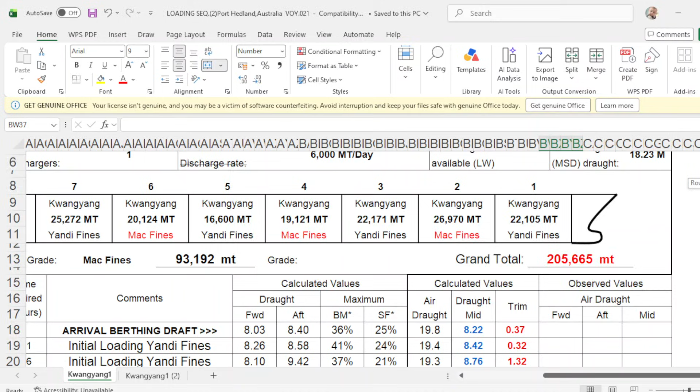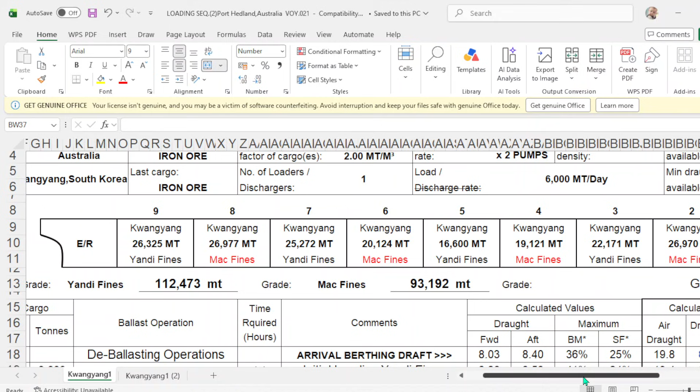If you remember last time, the cargo to load was 205,665 metric tons, and the trimming hold is 8 and 2. Okay, this is the Capesize vessel MV Cape Odyssey, loading in Port Hedland, Australia, and discharging in South Korea. The cargo is iron ore, and the water density at berth is 1.025. The cargo is Yandi Fines, and the vessel is to load from hold number 1 to hold number 9.

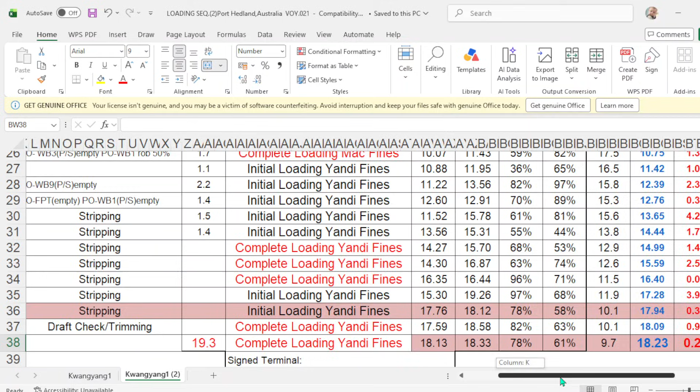This was our previous video about trimming hold of 2 and 8. Now, during that time when I was chief officer, the captain told me to make a loading plan or loading sequence for trimming cargo holds 2 and 8 and 1 and 9 with the same departure draft of 18.23 meters mid. The same draft forward 18.13 and aft 18.33, which is trimming hold of 2 and 8, and the mid draft is 18.23 and trim is 0.20. That is for trimming hold 2 and 8.

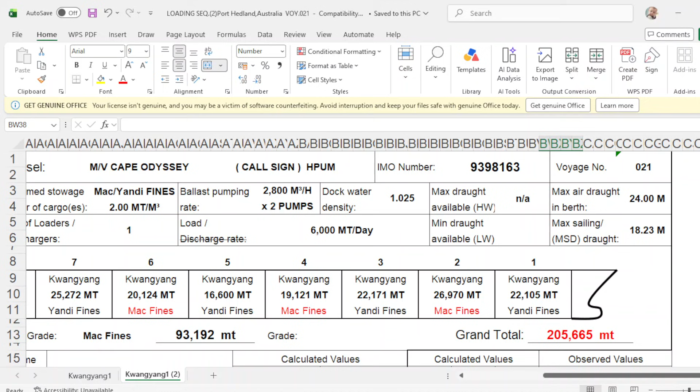Now the captain asked me to make another loading sequence, and the trimming hold would be 1 and 9, with the same draft forward of 18.13, aft 18.33, mid 18.23, and trim 0.20, with the same amount of cargo of 205,665 metric tons. So we'll just concentrate on this second loading sequence with the trimming hold of 1 and 9. Okay, so let's start, guys.

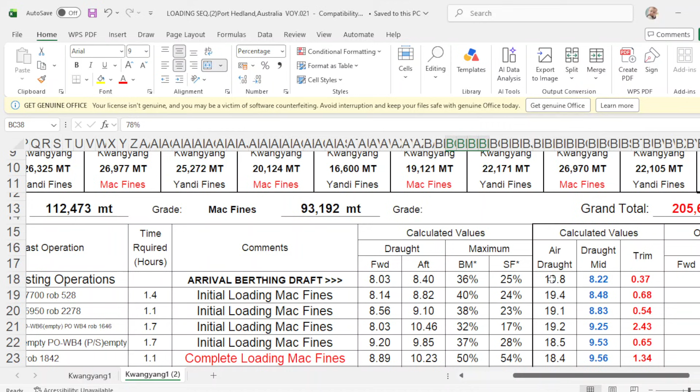Assuming that we have completed the draft reading and we both agreed that the forward draft is 17.76 meters, aft draft is 18.12 meters, the mid draft is 17.94, and the trim is 0.36. Usually the draft surveyor has his own program, and I myself have my own program. So let's begin, guys, and apply this draft to our program.

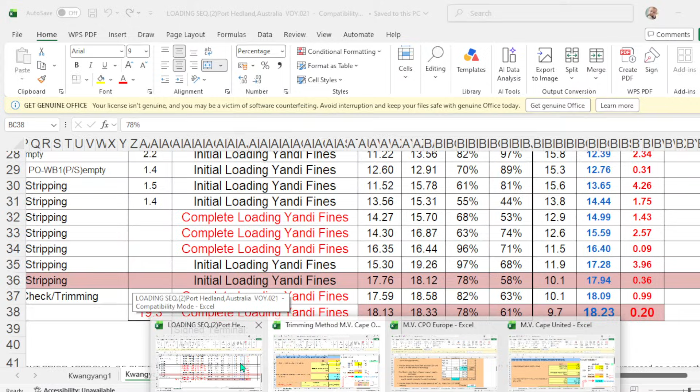So I will go to the vessel, which is MV Cape Odyssey. I'll start with form number 6, which is how to find trim when handling several moderate weights. So how much was the draft forward? Draft forward is 17.76, and draft aft is 18.12. Okay, so put there 18.12.

Take note that the mean draft is 17.94 and the trim is 0.36, LCF, MTC, and the TPC. Just take note of the TPC 138.70. Take note that at the start of loading the density is 1.025, and upon completion the density is 1.025. Then the surveyor and myself, or the chief officer, agreed that the actual mid port is 17.94, the same as your mean draft, and actual mid starboard is the same, 17.94.

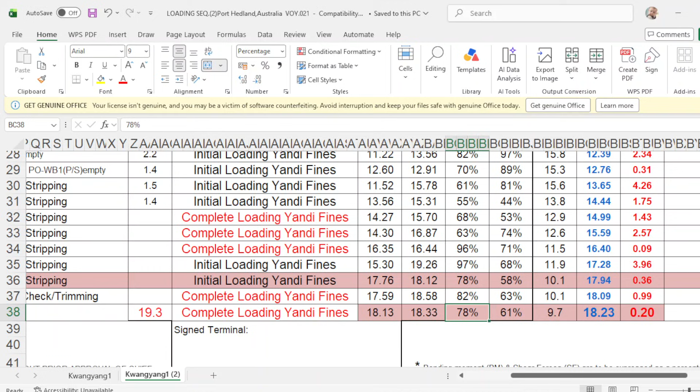And your final mid departure draft is 18.23, and this is your trim of 0.20. So your departure draft is 18.23, so put here 18.23. Then the recommended cargo to load for trimming is 4,022.6, while the sequence recommendation is only 4,000. So we are 22.6 tons more than the loading sequence, from the plan.

Okay, that's 138.71 times 100. So I will repeat: sinkage times TPC times 100 is 4,022.6. Okay. Then you scroll down, follow this arrow, then put this figure here. That will be 4,023. If you round it up, that will be 4,023.

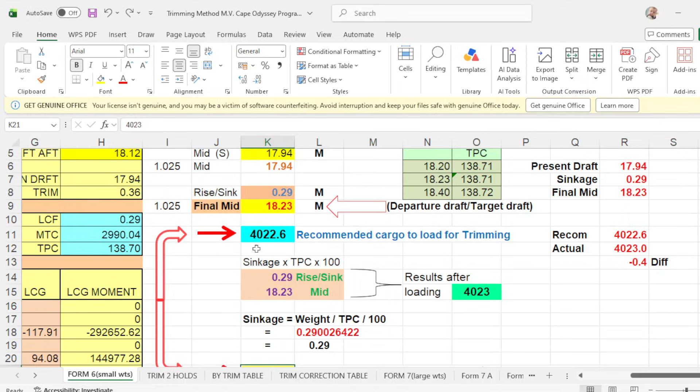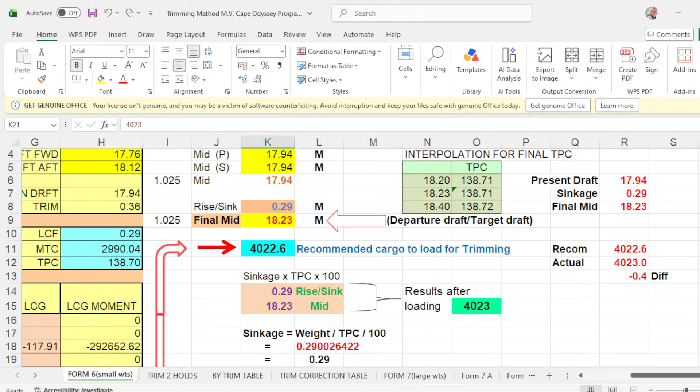So, your weight is 4,023 divided by your TPC of 138.71, divided by 100, then you will have 0.29, exactly the same as your sinkage here. Anyway, this formula here is the same as this one. I am just showing you how it is being done here. Okay, so let's go down.

Once you get your actual cargo to load for trimming, then you go to trim 2 holds. So you go to trim holds 2, click this one. Then trimming with 2 holds. Take note the remaining cargo for trimming is 4,023. Your initial draft, mid draft, trim, your MTC, LCF, and TPC. Then the trimming holds now are 1 and 9, right? Put 1 and 9.

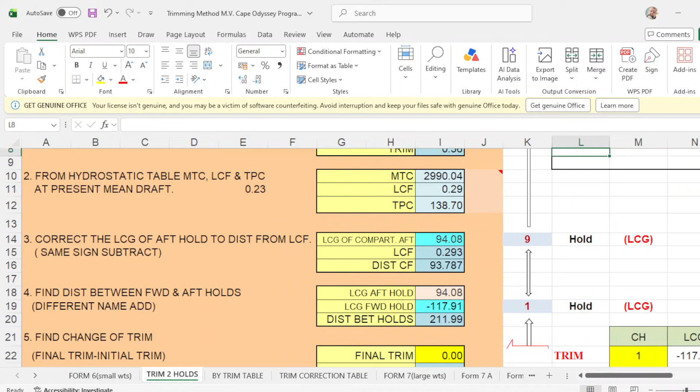Okay, take note that 1 and 9 are registered here and here. But if, for example, the trimming holds are 2 and 8, take note of the changes. 2, enter, 8. The figure here will also change. There's now 2 and 8. But our trimming holds are 1 and 9. So let's put it to 1 and 9.

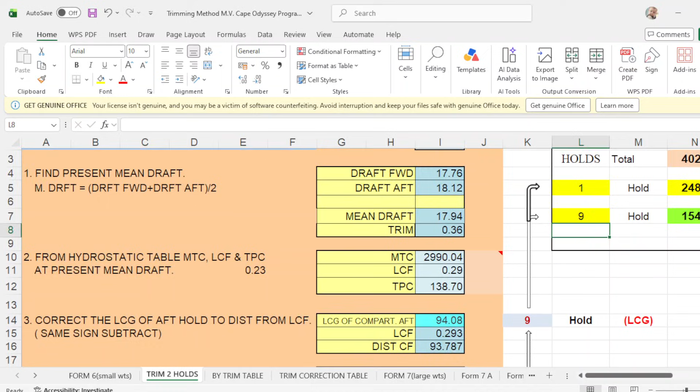Again, scroll down. What will be our final trim? According to our sequence, the final trim is 0.20. This is the mean draft and the trim of 0.20 or 20 centimeters. So we put here 20 centimeters or 0.2. Enter. And it will tell you what to load in hold number 1 and hold number 9.

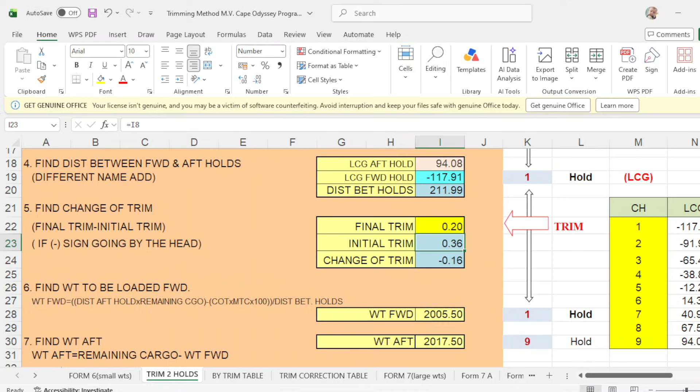So number 1, we have to load 2,005. Put here 2,005. Enter. And number 9 will be 2,018. If you round it up, your departure draft would be forward 18.13 and aft 18.33. Your trim is 20 centimeters, your mean is 18.23. Okay?

If departure draft is 18.23 and your trim is 0.20, then your deflection is 0. How I get this deflection is mid draft minus your mean. So where is your mid draft? Go to form number 6. Take note after loading 4,023, the result will be your mid draft of 18.23. You click this one, press enter, there you go. And your mean draft, press equals, and this is your mean draft. Press enter, and your deflection is 0.

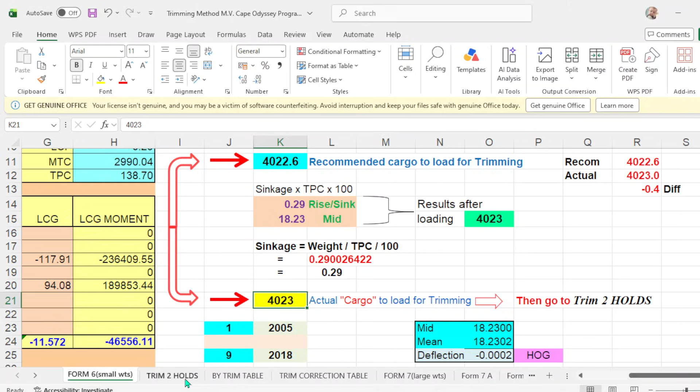Okay? So after completion of this program of 2 holds, you go back to form number 6. You scroll down. Take note that number 1 and 9 are registered here, and the cargo for number 1 is 2,005, and number 9 is 2,018, which is exactly the same here. Go back to form number 6. Then put holds 1 and 9 here. Put the cargoes corresponding to the cargo hold, and let's check the LCG of number 1. Scroll down.

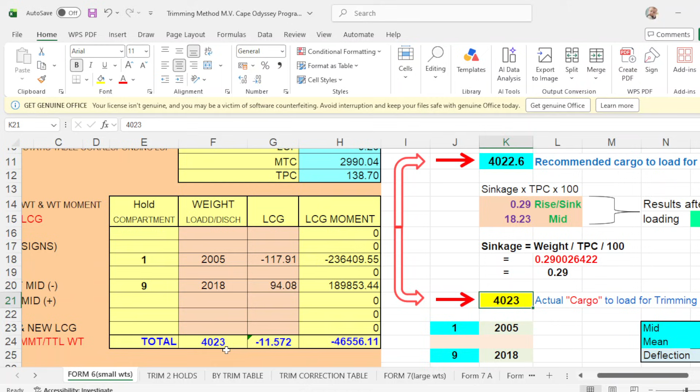LCG of number 1 is negative 117.91, and number 9 is 94.08. Okay? Then you scroll down. Your departure draft would be forward 18.13, aft 18.33, which is the same with your trim 2 holds. Okay? Forward is 18.13, aft is 18.33, which is the same here.

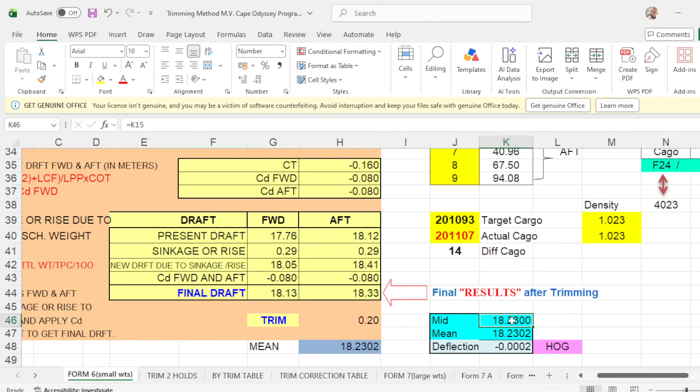Your trim is 0.20, and your mean is 18.23. Your mean is 18.23, and your deflection is 0. Again, where did I get this mid draft? Put equals, and your mid draft is this one. If you remember, press enter. And your mean draft, put equals there, and this is your mean draft. Take note that your deflection is 0. So mid draft minus mean draft is 0.

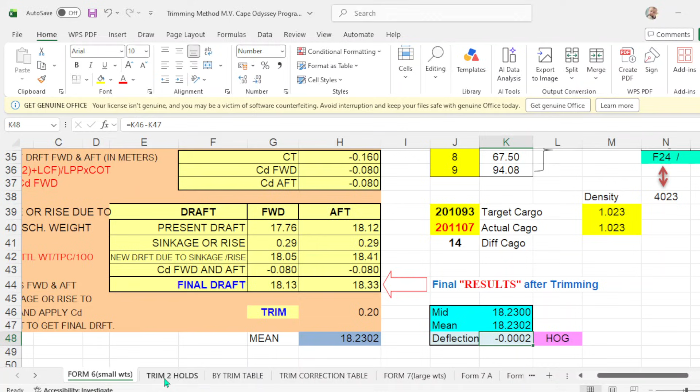So we have 2 programs form number 6 and trim 2 holds. Then we go by trim table. This will be program number 3. Take note of the trimming amount of 4023, trimming hold, and the amount of cargo in each hold to trim. Then we will apply the forward correction of hold number 1 and number 9. So we go back here to the trim correction table. That will be 1 and 9. Our departure draft is 18.23, so you select 18 because it's the nearest.

So hold number 1. Highlight this one, make it red and bold. And this one, put it back to normal, take out the bold. Then we go to hold number 9. That is L. Go to number 9. This is hold number 9. Make it red and bold. And this number 8, put it back to normal, to black and unbold. So this is now your 9 and this is your 1.

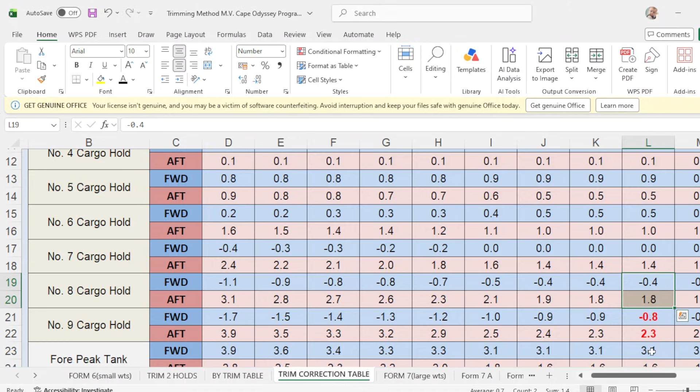So hold number 1, the forward correction is 2.7. So put here 2.7, and aft correction is how much? Negative 1.3. Put here negative 1.3. Then the forward correction in hold number 9. Go back here, hold number 9, scroll down. Number 9 forward is negative 0.8. Put here negative 0.8. And aft correction in hold number 9 is how much? 2.3. So put here 2.3. Then what will be your departure draft?

Your forward here should be 18.13 and aft should be 18.33. So first adjust this one. Your trim is short of 2 centimeters. So adjust this, make this 18.13. Go up a little bit. Then adjust the forward correction. This is your forward correction. This is your aft correction. Then you adjust the forward, make it 18.13. Let's say make it 2.6.

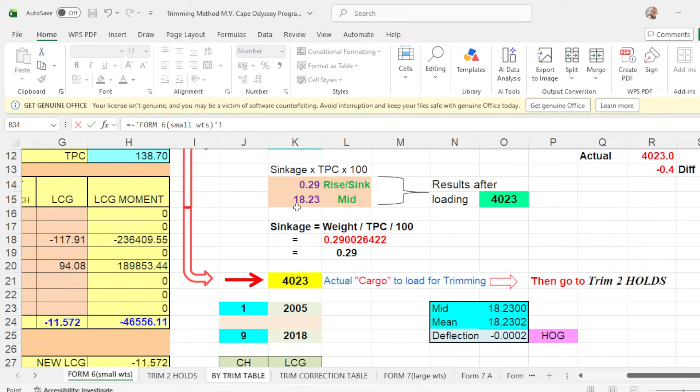Forward is 18.13, aft is 18.33, mean is 18.23, mid is 18.23, trim is 20, and it's now okay. The same with your draft here: forward 18.13, 18.33, 18.23, and 23, which is the same here. Now take note, your deflection is 0. You have to know where I get the mid. Put equals here, go to form 6, and this will be your mid. After loading this cargo of 4023, this should be your departure mid. And your mean draft is equals, and this should be your mean draft.

Okay. I'm sorry. Equals, this one, and click this one. And your mean equals, then click this, your mean, then your deflection is 0.

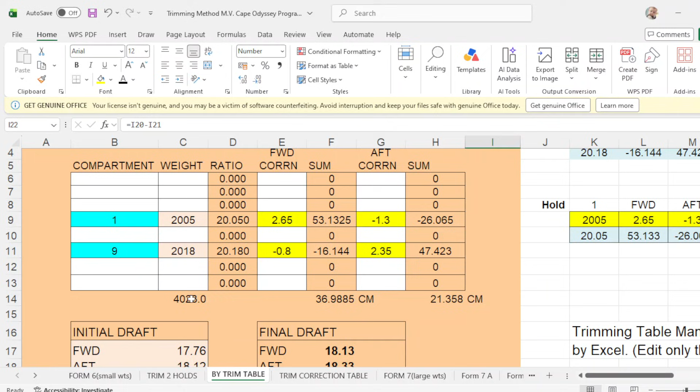Now take note, guys. You don't know which cargo hold to load first. It's either 1 or 9. If you load number 1, you will trim by the head, and if you load number 9, you will trim by the stern. So I would prefer you load number 9 so that you will have a good trim by the stern before you load number 1. So here I made a program where we load first in hold number 9. Take note of hold number 9.

The cargo is 2018, which is the same here. Correction is negative 0.8, same here, and 2.35 here. And number 1, the amount of cargo is 2005, the same here. Correction is 2.65, and aft is negative 1.3. Same. Take note that the initial draft forward is 17.76 and 18.12 aft, which is the same here. 17.76 and 18.12.

After loading hold number 9 of 2018, your final draft will be, initial draft will be 17.60, and aft is 18.59, and you are trimmed by the stern. Carry this down, then you load in hold number 1. After loading 2005, your final draft will be forward 18.13 and aft is 18.33. Your trim is 20 centimeters and mean is 18.23.

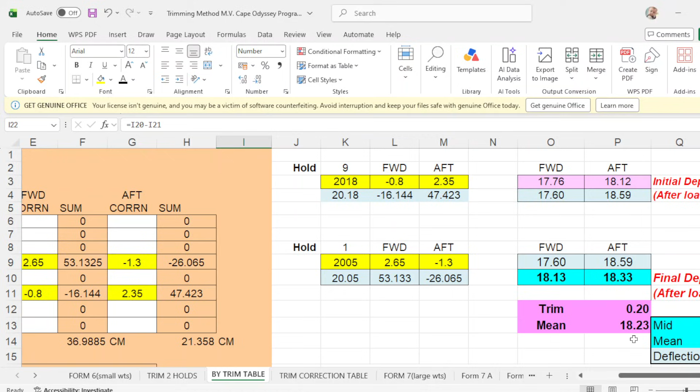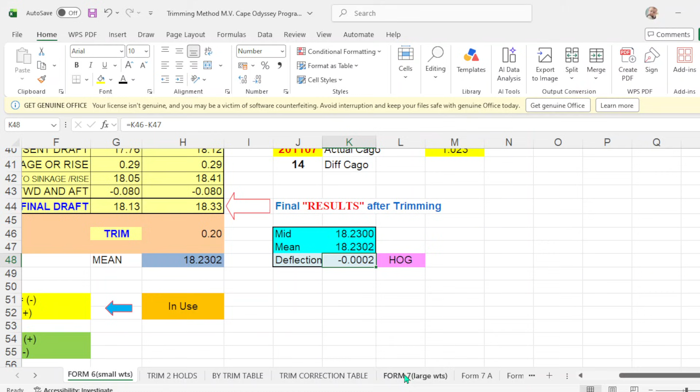Okay, and your deflection is 0, the same here. So this is program number 1, trim by trim table. Program number 2, trim 2 holds, and number 3 is the same here. So you have 3 programs here, and the fourth program, form number 7.

Form number 7 has to find draft and trim when handling weights involving large changes in mean draft. Take note that the density at the start of loading is 1.025 and on completion of loading is 1.025. To make a shortcut or to ease your computation, you just put equals here.

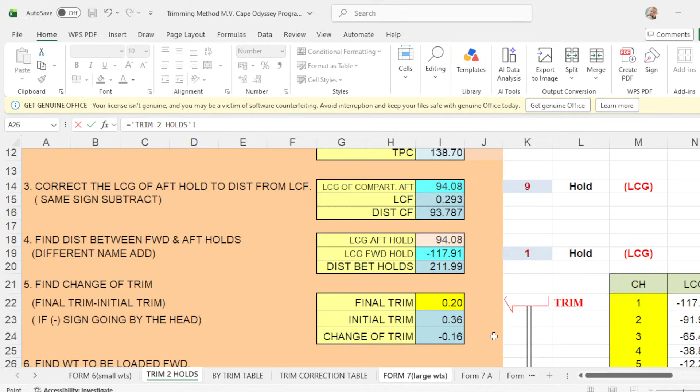Okay, equals. Then you go to trim 2 holds. Then you press 1. The forward draft. Forward draft. You go to form 6. Okay, you go to form 6. You forward draft here. Click enter. There you go. Then aft draft.

You press equals. Then you go to form number 6. Aft draft is 18.12. Enter. Okay, so you will have your mean draft of 17.94. Trim is 0.36. Okay.

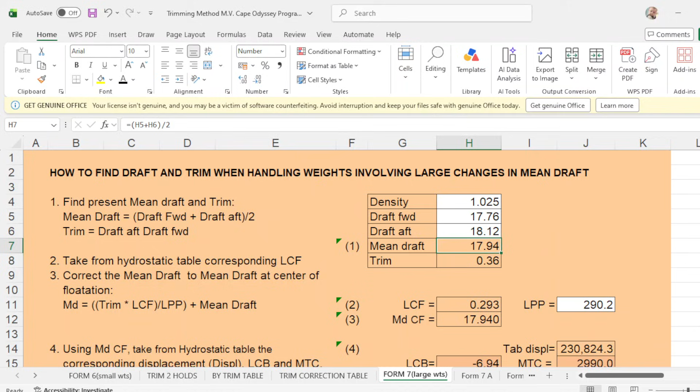Then you apply now the cargo to load for trimming. So number 1 here, press equals, go to trim 2 holds, put 1 there. Okay, and number 9 equals, go to trim 2 holds and click number 9. And the cargo in number 1, press equals, go to trim 2 holds and press this one. Okay. And number 9 cargo, you press equals, then you go to trim 2 holds, then you press this one.

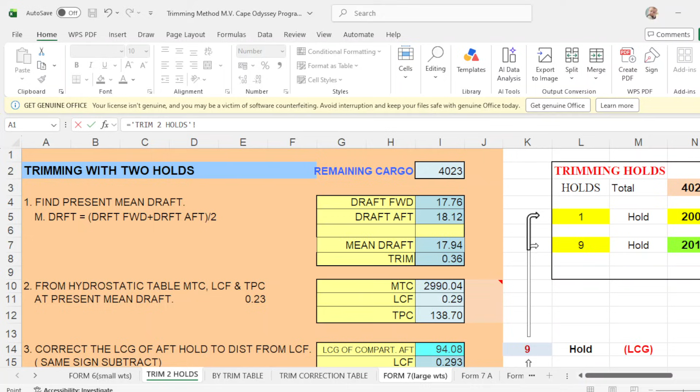Okay, then apply the LCG. So what is the LCG of number 1? Say equals, then go to trim 2 holds, then scroll down. The LCG of number 1 is this one, negative 117.91. Press enter. Then there she goes.

And number 9, you press equals. We go to trim 2 holds. And number 9, LCG will be 94.08. Okay, 94.08. Press enter. Then there goes. Then you scroll down.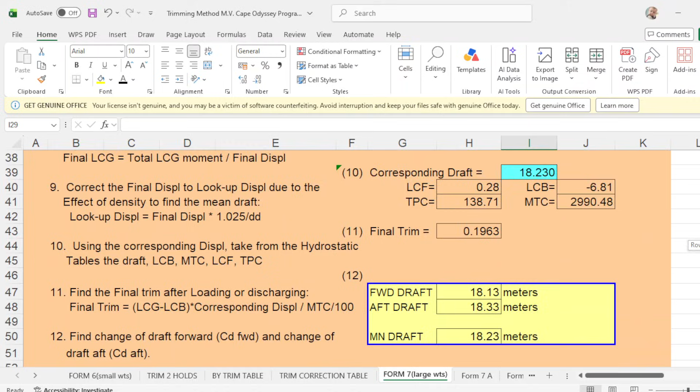Your mean draft will be 18.23 and your departure drop would be forward of 18.13, aft is 18.33, which is forward 18.13, aft 18.33, which is the same here. Okay, and your main drop is 18.23.

18.23, and your trim is 020, which is the same here. If you run the top, this will be 20 centimeters. Then your deflection is 0, hog here. So again, you press this one, you get your mid drop, then you go to form 6,

and your mid drop is this one. After loading 4023, click this one. There you go, and your mid drop, click this one. Click this one, and that will be your main drop, and your trim is 0, or your deflection is 0.

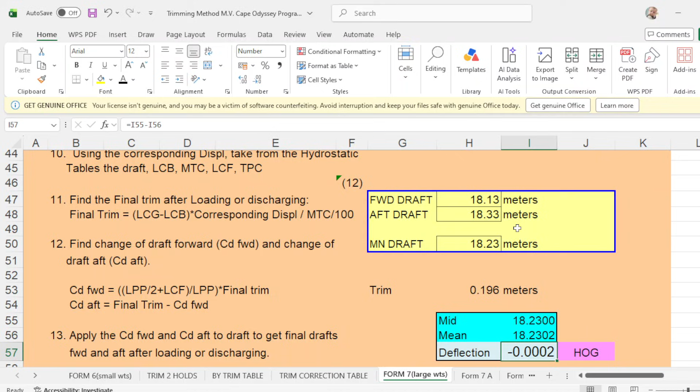It's either you can use this one or the other one, equals, or this is also your main drop, corresponding drop, this one. Click this one. Okay, so it's 004. You want to reduce this one, you can use this one, equals, and use this main drop. It's 002. Okay, so that will be the same departure drop according to your loading plan.

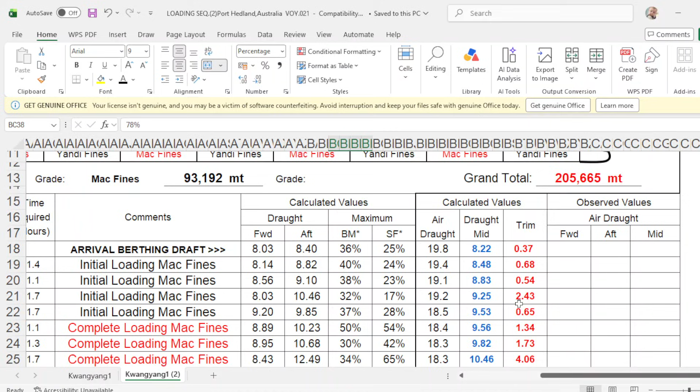Okay, forward is 18.13, aft is 18.33. Okay, and your mid drop is 18.23, and your trim is 020. Okay, so you actually hit according to your plan. You get a target of your sailing drop, your forward and up drop, your trim, and your main drop.

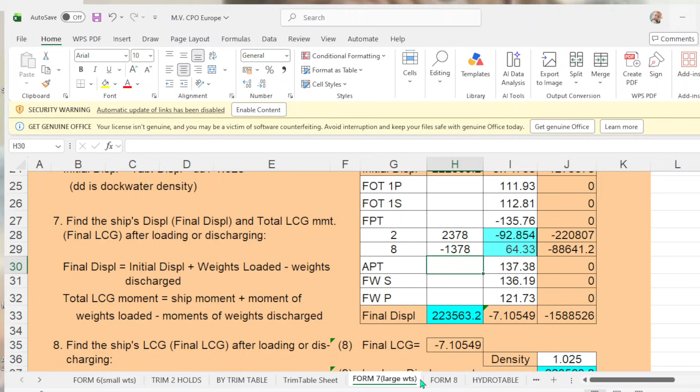Okay, now this is for the vessel Cape Odyssey. Okay, now for example, another Capesize vessel, CPO Europe, using the same program, loading sequence. Okay, so we put here, forward is how much?

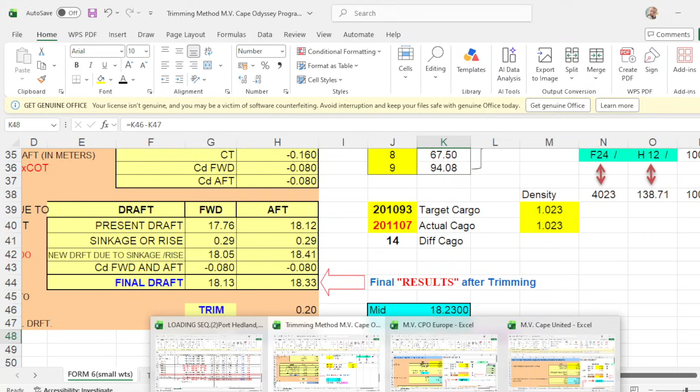Cape Odyssey, let me see it this way. To make it forward service 1776, to 1776. This is CPO Europe, 17.76, and aft draft is how much?

1812. So 1812, 18.12. Okay, then your main drop is 1794. Your trim is 036. LCF, MTC, and TPC. Then you put your mid port, the same as your mid drop of 1794.

94. So with your mid starboard of 1794, 94. And your departure draft is 18.23, right?

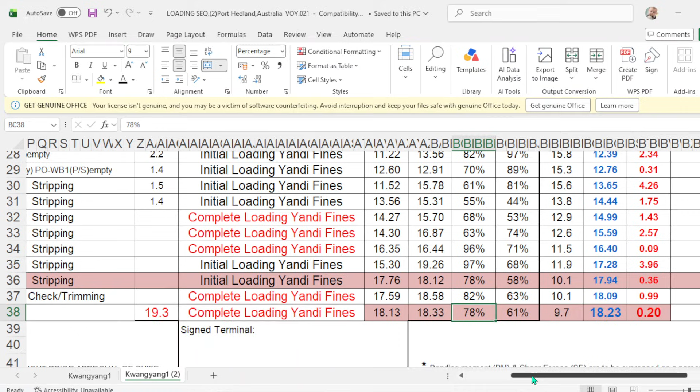18.23 minus 17.94 is 0.29. This is your sinkage. Again, 18.23 minus 17.94, that will be 0.29 as your sinkage. And your recommended cargo per trimming is 4,000, exactly the same with your loading sequence of 4,000. Okay.

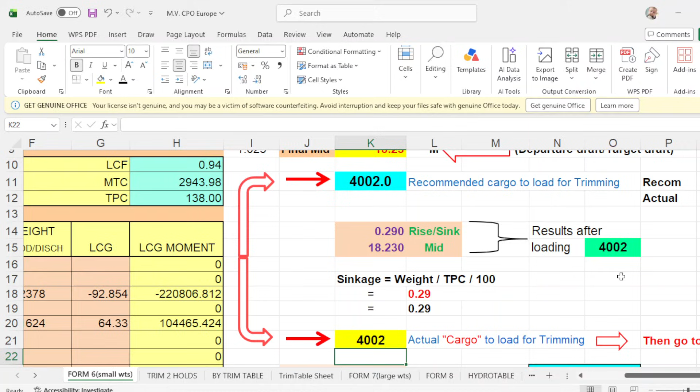So you scroll down, put here 4002. 4002. After you load 4002, your mid drop will be 1823, the same here, and your sinkage is 029, which is the same here. Okay.

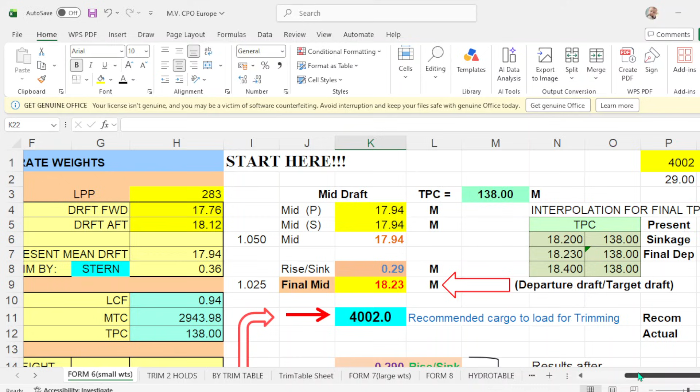Take note of the actual cargo tolerable trimming is 4002. So I get here. For checking, I put there 4002. Put the TPC for your final mid of 1823. You interpolate the TPC, that will be 138. So I have it 138. I put it 138.

4002 divide your TPC 138, that will be 29. Divide by 100, that will be 0.29. This should be your sinkage, okay? Put this sinkage, okay, that will be your sinkage. Put this sinkage and make it that will be your sinkage, okay? So your present draft, mid draft is 1794, which is this one. Your sinkage is 0.29. Add this one, that your final departure draft will be 1823, which is this one, okay?

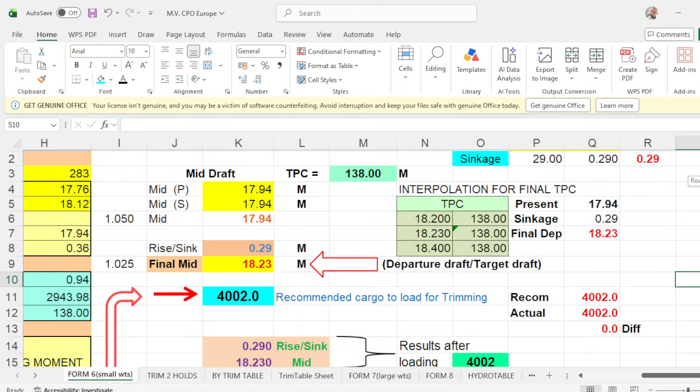You're going to trim holds 2. Trim holds 2, trimming 2 holds. Take note the trimming cargo to load was 4002. Your initial draft, mean draft, trim, MTC, LCF, and TPC. Your trimming hold is 1, plus 1, and 9. Okay. Scroll down.

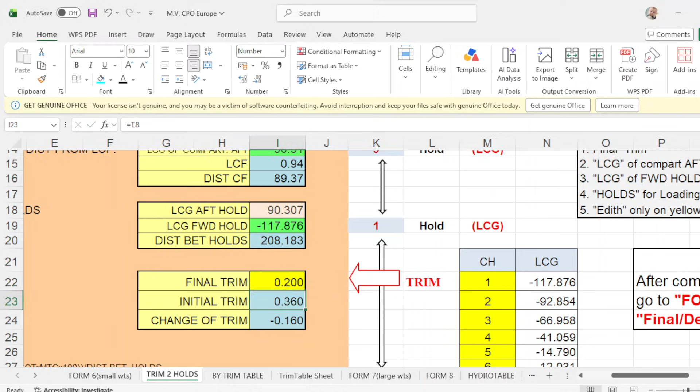Take note, your final trim was 0.20, press enter. And the recommended cargo to load for hold number 1 is 1944. So put here 1944. Then number 9 should be 2058.

2058. You run it up, and your departure draft forward will be 1813. Aft is 1833. Trim is 20 centimeters. Mean is 1823. And your deflection is 0.

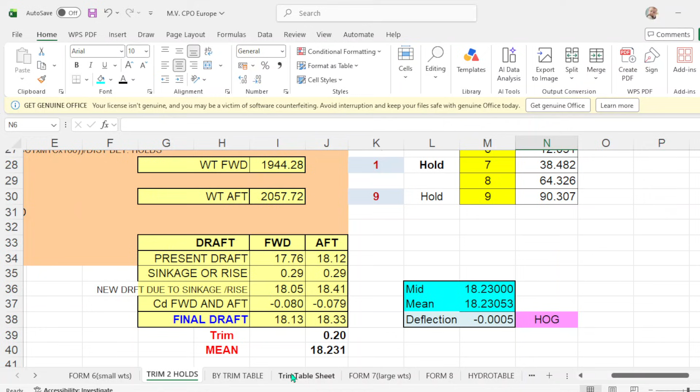Okay, then you go back to form number 6. Take note of to load in number 1 and 9 is 1944, 2058. Okay, 1944, 2058. Okay. Then put hold number 1 and 9 here. Put the figures for each hold and check the LCG.

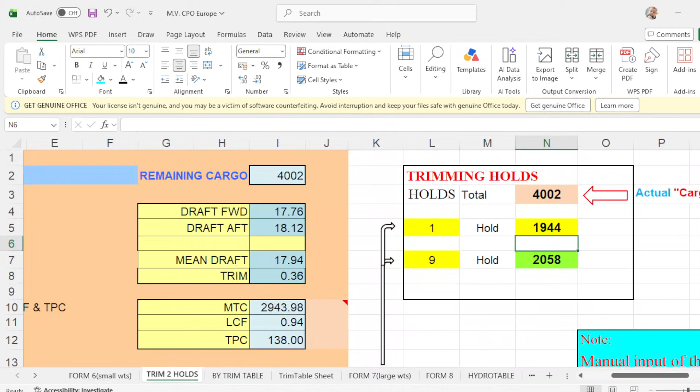So LCG of number 1. LCG of number 1, scroll down. LCG of number 1 is negative 117876, and 9 is 90.3. Okay, then scroll down.

You have the same draft, departure draft 18.13, 18.33. Trim is 20, and mean is 18.23. Your deflection is 0. Okay. So you have 2 programs, form number 6 and trim 2 holds.

You highlight this one to red. Okay, and make it bold. And put this back to normal, to black and unbold. There you go.

1 and 9, go to 9. Number 9 is this one. Make it red and bold. Okay, and this one, put it back to normal, to black and unbold.

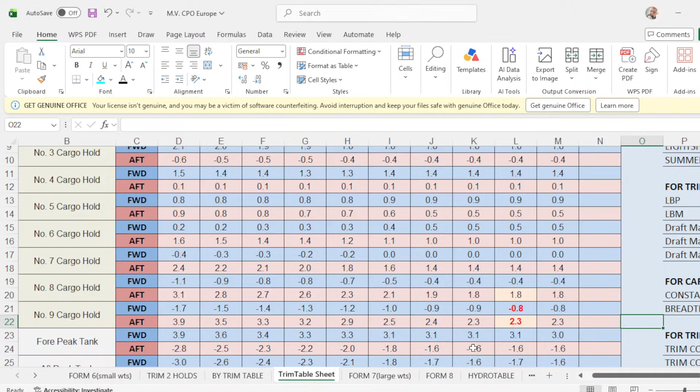And forward correction hold number 9. Hold number 9, scroll down, and hold number 9 forward is negative 0.8. Negative 0.8. And number 9 aft correction is 2.3.

2.3, enter. And your sailing draft is, forward is 18.12, it is short of 1 centimeters, and aft is 18.34, which is more of 1 centimeters. So we adjust number 1.

So number forward draft, so 2.7, we make it 275. Then get a target forward of 1813. And this one aft, make it 1833. Make it 225. 25. What is 25?

18 forward now is 1813, aft is 1833, mean is 1823, mid is 1823, your trim is 20, your deflection is 0.

Okay, then number 1, you have to load first in number 9 so that you will have a good trim. Take note of the figures.

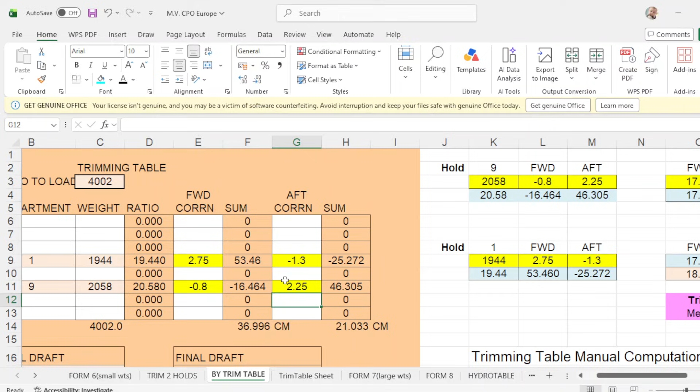2058, correction is negative 0.8, aft is 225. Then hold number 1, 1944, forward is 275, and aft is negative 13.

Take note of the initial draft, and your final draft is 1813 forward, up is 1813, 1833 up. Trim is 20 centimeters, mean is 1823, and your deflection is 0. Okay? So that should be your

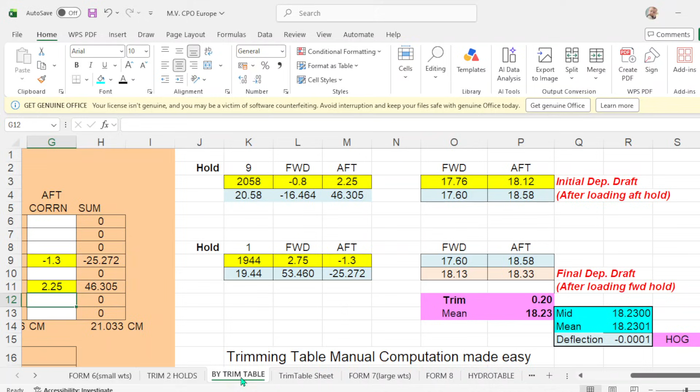number 3 program by trim table, by trim 2 holds, and form number 6. Okay?

Then the fourth program is form number 7, which is how to find draft and trim when handling weights involving large changes in wind drop.

Again, at the start of loading, the density at berth is 1.025 and on completion is 1.025. Okay. Then you put your initial forward draft equals, you go to, you can press this one, it's the same.

That will be 1776, and your aft draft is equals, aft draft is 1812. Press enter. Then your mean draft is 1794, your trim is 036.

Okay, then you apply now the cargo to load. So in number 1, press enter.

You go to trim 2 holds, press this one, and number 9 equals trim holds to, press number 9.

Okay. And figure in number 1, how much? Press equals to trim holds to, then press this one. There you go, and equals here.

Go to trim holds to and press the amount of figures. 2058, okay?

And your LCG of number 1, press enter. We go to trim holds to number 1. Scroll down. Number 1 is negative 117.876. Press enter.

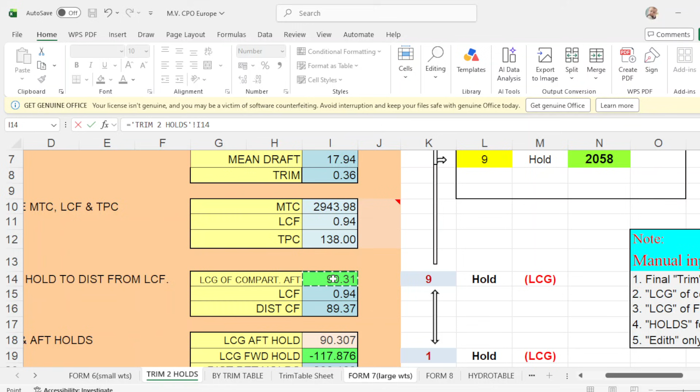And hold number 9, LCG. Go to trim holds to number 9 is 90.31. Enter. And what will be your departure draft?

Your mean draft is 1823 here. And your forward and aft draft is 1805. 1841. What happened here? Double check, guys.

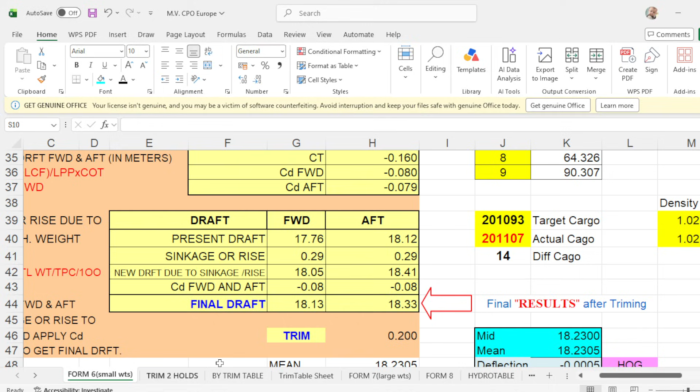Something wrong with this one. It is 76, 1812. Okay. I'll do it again, guys.

Okay, equals. Beautiful. Very, very well done. So this is press this one. Okay. Then equals. Press this one. Is different from this.

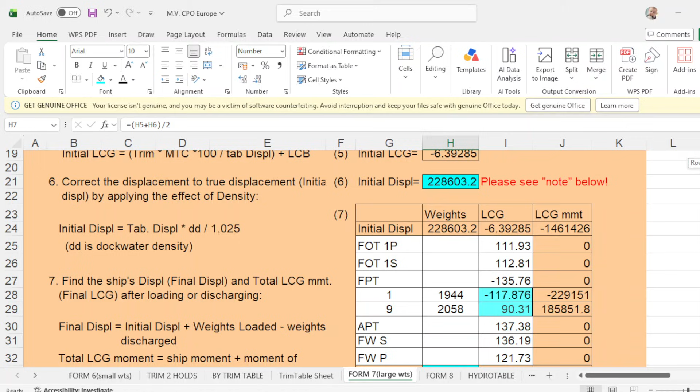So there's this kind of press equals trim holds to 1, 9. Press 9, equals here.

Number 1 amount is equals here. Number 9. Press this one.

LCG of number 1. LCG number 1. You go scroll down. LCG of number 1. Press this one. Then LCG of number 9. Number 9 is this one. Okay.

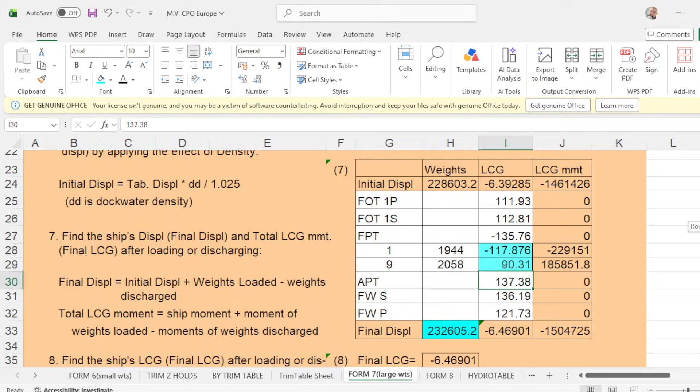What matters more is your mean draft of 1823. You will still get the cargo. So this is the vessel for

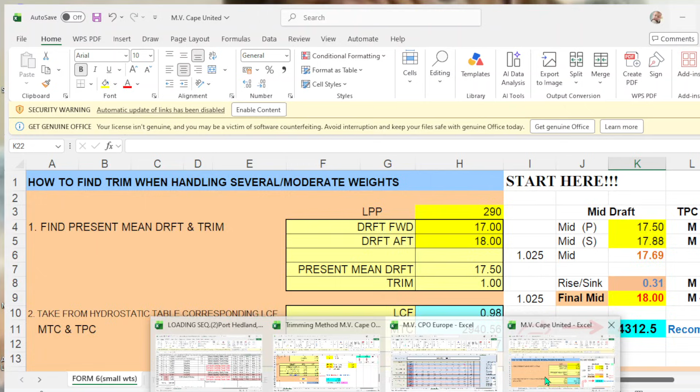CPO Europe. Then we have another vessel, the last one, which is

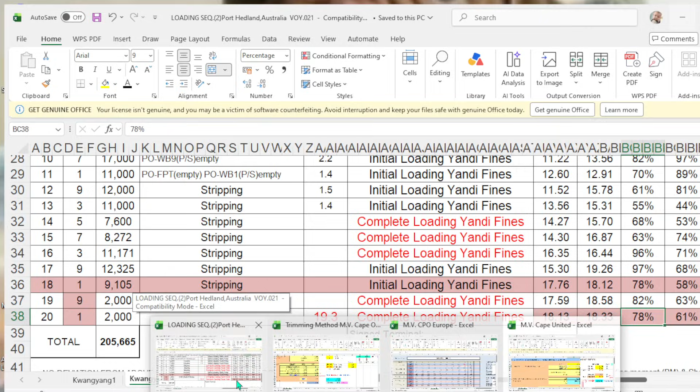17.76. Draft aft is 1812. Okay, 18.12. Then your present mean draft is 1794. Trim is 037.

LCF, MTC, and TPC. Okay, so you write here 1794, 17.94 and 17.94.

Your departure draft of 1823, the interpolation of TPC is 138, this one. And the recommended cargo to load is 4002. Okay, 4002.

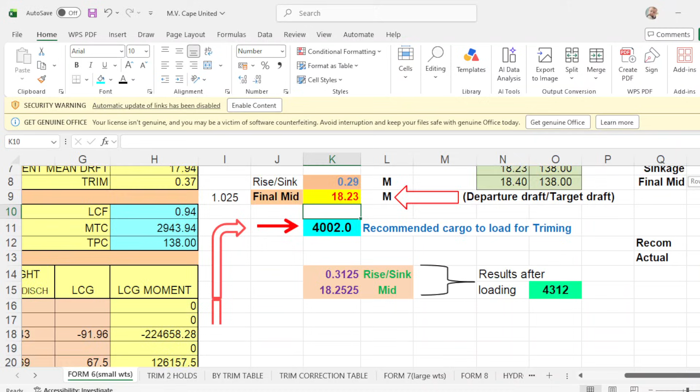You put here 4002. After loading 4002, your mean draft would be 1823, which is the same here, and your sinkage is 29, which is the same here.

Take note of your remaining cargo to load is 4002, and your final TPC of the mean draft is 138.

4002 divided by 138, that is 29 divided 100, that will be 29, this will be your sinkage. Okay. Okay.

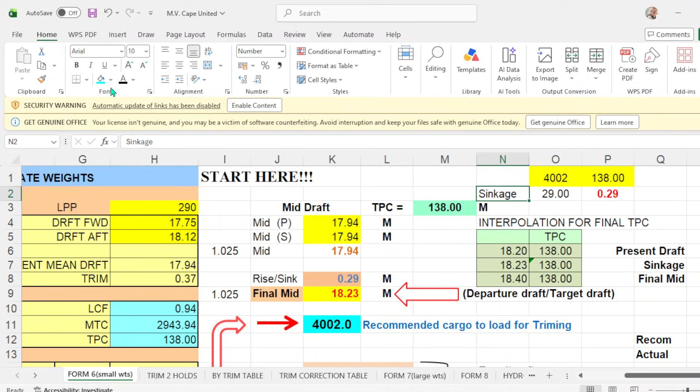And I will go this to this one. That will be your sinkage. So your present draft is 1794 plus your sinkage of 029. Your final mid will be 1823, which is the same here.

And the recommended cargo to load will be 4002, and the actual cargo to load is 4002. There's no difference. Then we go to trim 2 holds.

You put the trimming hold of, this is your initial draft, mean draft, trim, and your MTC, LCF, and TPC. Put your trimming hold is 1 and 2, 1 and 9, sorry. And your trim is 20 centimeters. So 0.20.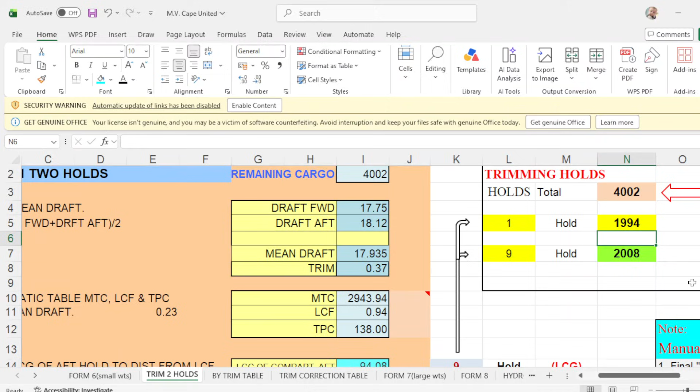And how much are going to load in number 1 is 1994. You put here 1994, and number 9 is 2008.

2008. Okay, and your departure draft forward will be 18.13, aft is 18.33, trim is 0.20, mean draft 18.23, and your deflection is 0. That will be trim 2 holds. Second program, the first program, form number 6 is the same draft of 18.13 forward, 18.33 aft, 20 centimeters trim, and your mean draft is 18.23. So that will be your second program, and the third program is by trim table.

Your trimming table, take note of the cargo to load is 4002, holds 1 and 9, the amount of cargo to load, and we will apply the correction forward and aft of holds 1 and 9. So what is the correction on hold number 1? So 18.23, you use this draft mark of 18. So hold number 1, highlight this one, make it red and bold. And this one back to normal, number 1. And this one back to normal, make it black and unbold.

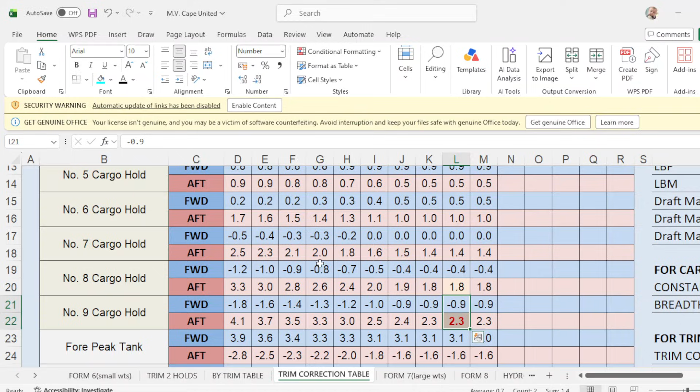Okay, then we go to hold number 9. Hold number 9, this one, make it red and bold. And number 8, make this to normal, make it black and unbold. No, it should be black and unbold. This one should be red and bold. Okay, so you go to hold number 1.

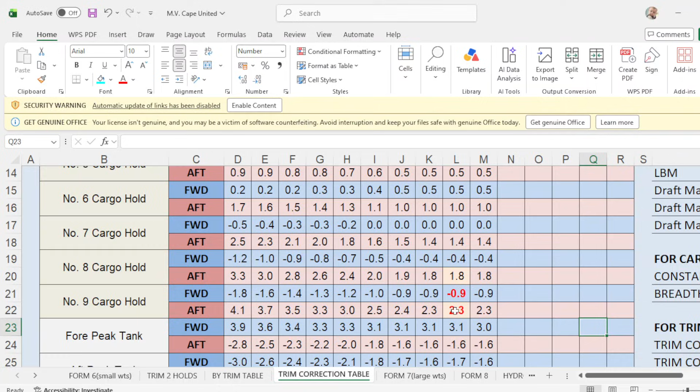Forward correction is 2.7. So put here 2.7, and aft correction is how much? Negative 1.3. So negative 1.3, and number 9 is how much? Scroll down. Number 9 forward is negative 0.9. Negative 0.9. And aft correction is how much? 2.3. So you put here 2.3.

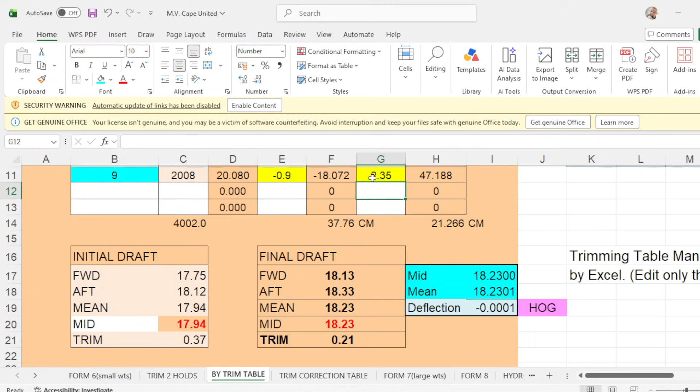Okay. Then what will be your departure draft? You are short here of 2 centimeters and short here of 1 centimeter. So that should be 1.3, make this 2.8. Okay. Take note of the changes for your forward draft. Then 18.13. Okay. Then increase this one by 1 centimeter. So make this 4. Okay. So make it 3.5. 3.5. There you go. But this is more. Should be 20. So reduce this one. Make it 4.

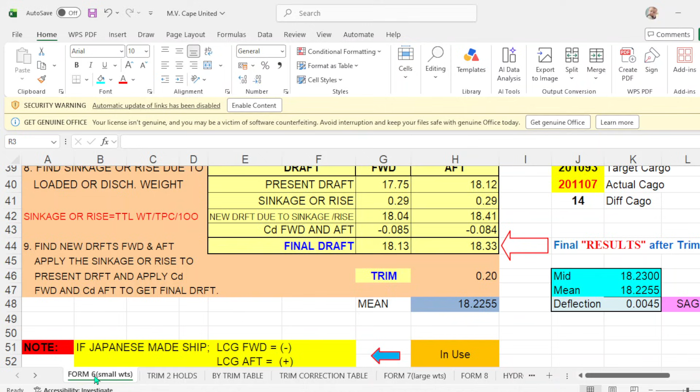What is your trim? Now, forward is 18.13, aft is 18.33, mean is 18.23, mid is 18.23. Your trim now is 0.20, and your deflection is 0. So this is your third program. Trim 2 holds, by trim table, trim 2 holds, and form number 6. Okay.

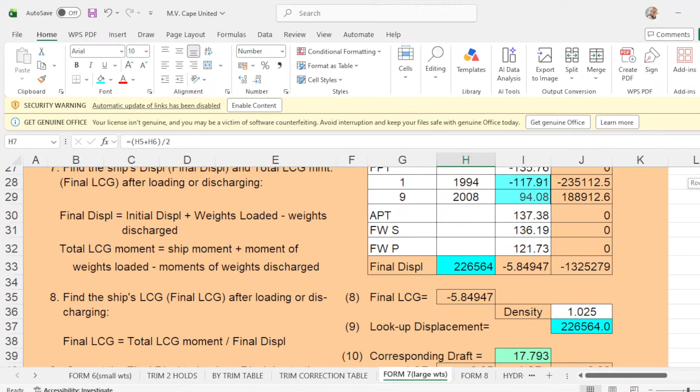Then we go to the fourth program, form number 7, how to find draft and trim when handling weights involving large changes of draft. So at start of loading density is 1.025, and upon completion your density is 1.025. Okay, so put now your forward draft equals here. Go to form 6, press this one, 17.75. Is that correct?

17.76. Okay, it should be 17.76. Okay, 17.76. Okay, then we go. This is now 14.

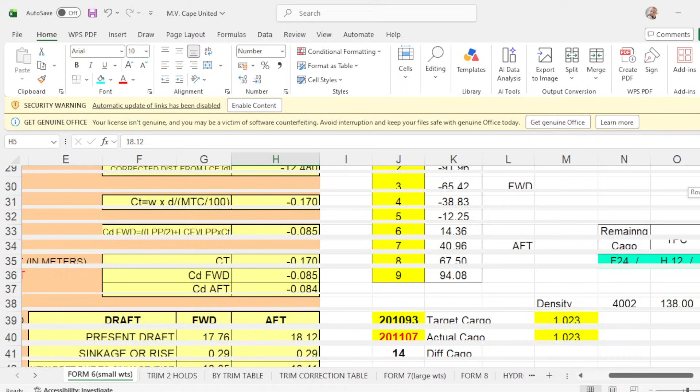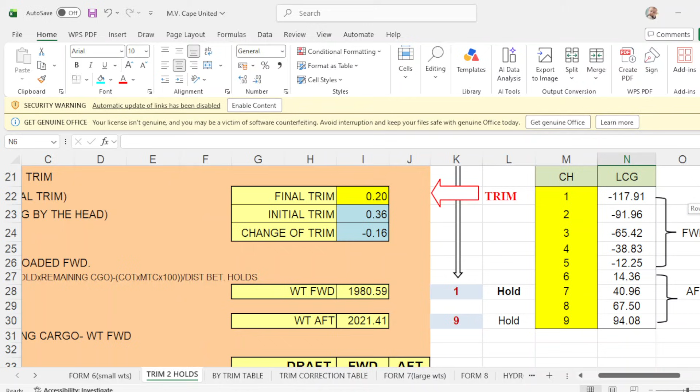94. Should be 18.13. 19.80. Should be 1980. 2022. 1980, 2022. Okay. Trim table. Adjust now the aft. This is 24, 34. Make this 3. Make this 3. Now 18.13, 18.33, 18.23, 18.23, 20. Deflection is 0. Okay.

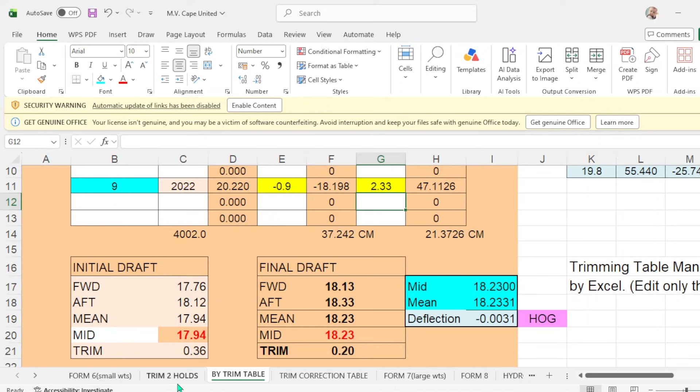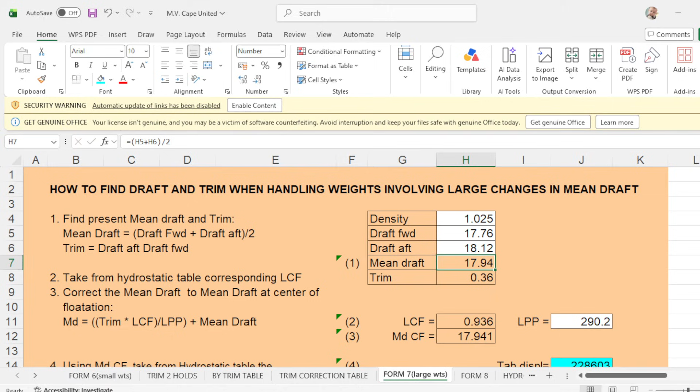That will be the same here. The same. Forward and aft, the same here. Okay. 13, 33. Okay. Then we go to the fourth program. Press this one, equals. Then you go to forward draft, 17.76. Aft draft is 18.12. Yeah, 18.12. Okay. Then scroll down. You push equals.

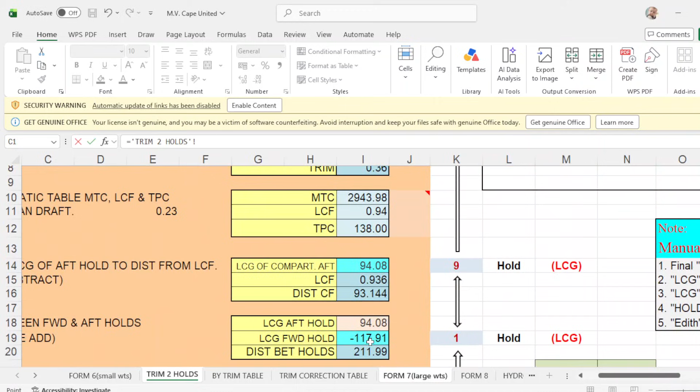Go to trim 2 holds. Press 1. Then number 9 equals. You put 9. There. Number 1 equals. How much you load in number 1? 1980. And number 9, how much you load? 2022. Okay. The LCG of number 1. You scroll down. That will be negative 117.91. And LCG of number 9. Press enter. Number 9 is 94.08.

And your departure draft is 18.23 mid or mean, and departure draft forward is 18.13, aft is 18.33, your mean draft is 18.23. You round it up, this will be 20 centimeters trim, and your deflection is 0. So that's it, guys. You can use this program for any capesize vessel, as I have already shown you in this example.